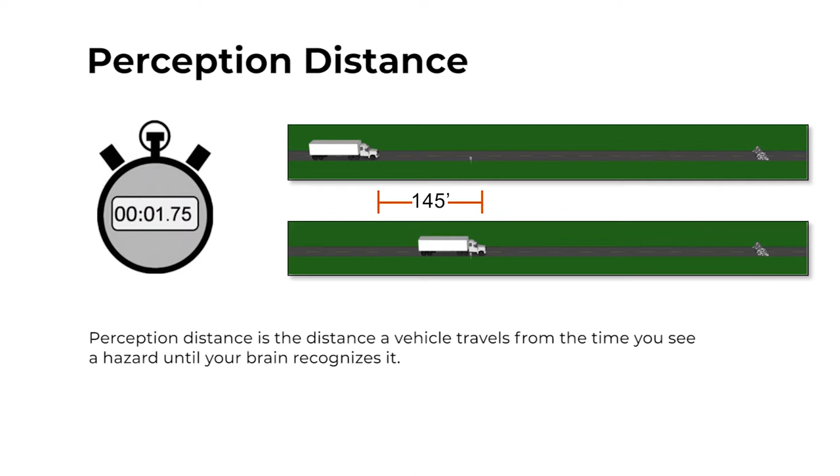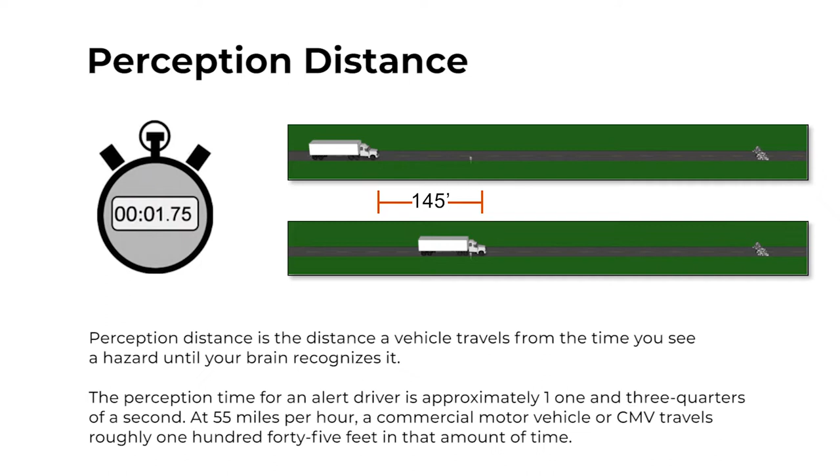Perception distance is the distance a vehicle travels from the time you see a hazard until your brain recognizes it. The perception time for an alert driver is approximately 1 3/4 of a second. At 55 miles per hour, a commercial motor vehicle, or CMV, travels roughly 145 feet in that amount of time.

Reaction distance is the distance a vehicle travels from the time your brain tells your foot to move from the accelerator until your foot hits the brake pedal. The average driver has a reaction time of 3/4 of a second. At 55 miles per hour, that accounts for an additional 60 feet traveled.

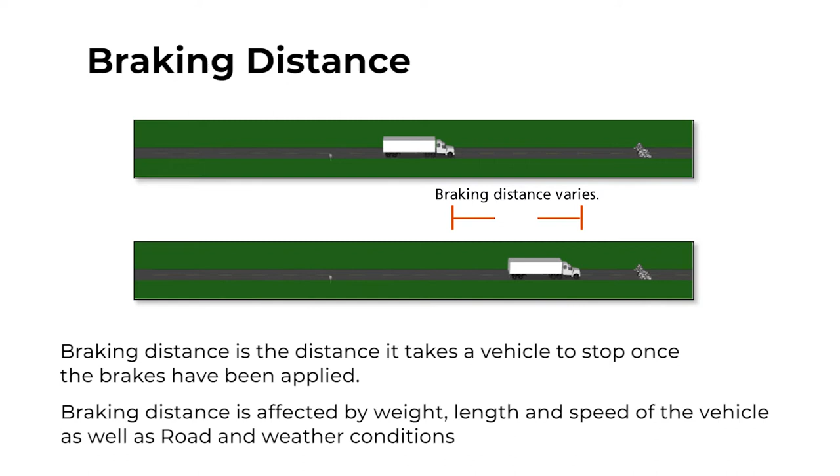Braking distance is the distance it takes a vehicle to stop once the brakes have been applied. Braking distance is affected by weight, length, and speed of the vehicle, as well as road and weather conditions.

Weight: the heavier the CMV, the more work the brakes have to do to stop it. But brakes, tires, springs, and shock absorbers on heavy vehicles are designed to work best when the vehicle is fully loaded. Empty CMVs require greater stopping distances, as an empty vehicle has less traction than a full vehicle.

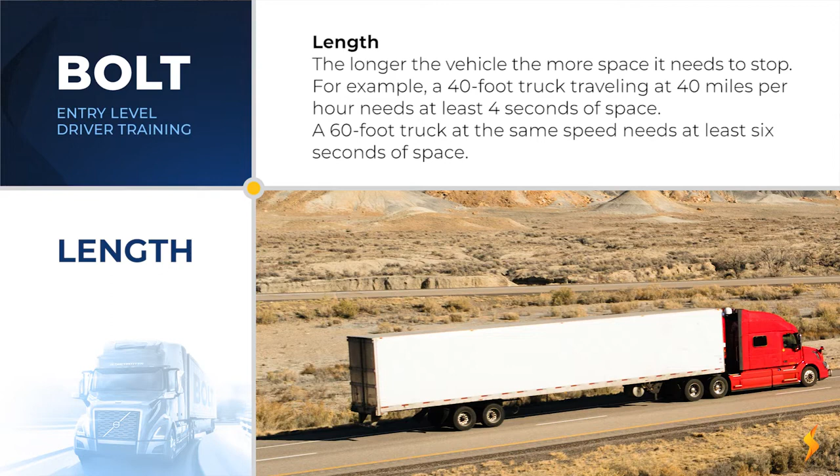Length: the longer the vehicle, the more space it needs to stop. For example, a 40-foot truck traveling at 40 miles per hour needs at least 4 seconds of space. A 60-foot truck at the same speed needs at least 6 seconds of space.

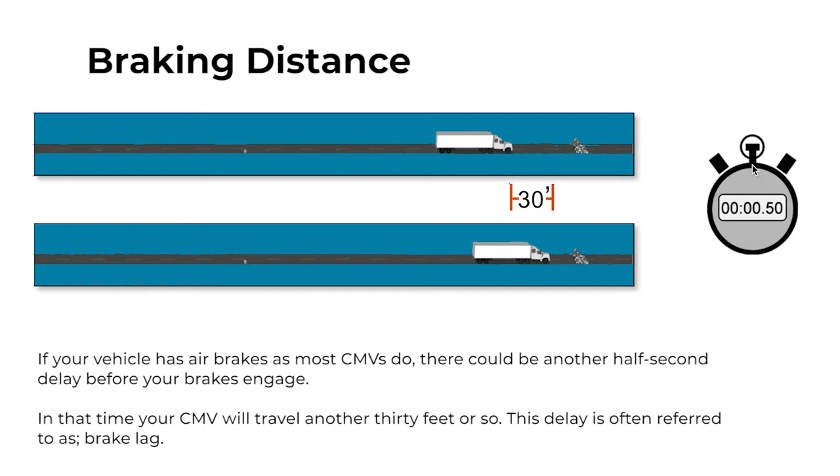Speed: the faster you drive, the greater your braking distance. When traveling at 60 miles per hour, the braking distance is 9 times greater than when traveling at 20 miles per hour. If your vehicle has air brakes, as most CMVs do, there could be another half-second delay before your brakes engage. In that time, your CMV will travel another 30 feet or so. This delay is often referred to as brake lag.

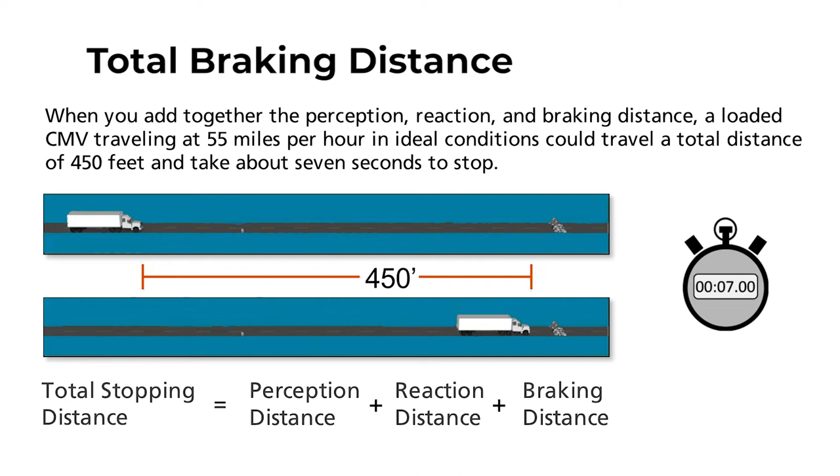When you add together the perception, reaction, and braking distance, a loaded CMV traveling at 55 miles per hour in ideal conditions could travel a total distance of 450 feet and take about 7 seconds to stop. When traveling at higher speeds, that stopping distance will be even greater.

How a road is designed will also play a part in how you manage your vehicle's speed. When operating a CMV on a curve or grade, you will need to take factors into consideration that you may not have to address when operating your car or truck.

The posted speed limits on curves are designed with cars in mind. Driving a tractor-trailer through a curve too fast, at or above the posted speed limit, can cause several problems, including skidding off the road or rolling the vehicle over.

Slow to a safe speed before entering a curve, at least 5 miles per hour below the posted speed limit. Slow down as needed, but keep in mind that braking in a curve can be dangerous. It is easier to lock your vehicle's wheels and cause a skid. Never exceed the posted speed limit in a curve.

Also, to help maintain vehicle control, be in a gear that will let you accelerate slightly as you go through the curve. Gravity and vehicle weight play a part in speed management when driving on upgrades and downgrades.

On an upgrade, your vehicle has to work harder to fight the pull of gravity and maintain its speed. To maintain speed, you must place more pressure on the accelerator and/or possibly shift to a lower gear.

On a downgrade, your vehicle is working with gravity, resulting in an increase in speed. Vehicle weight also has an impact on truck speeds going down a grade. Heavier trucks want to accelerate faster than lighter ones. You must use care in maintaining a safe and even speed.

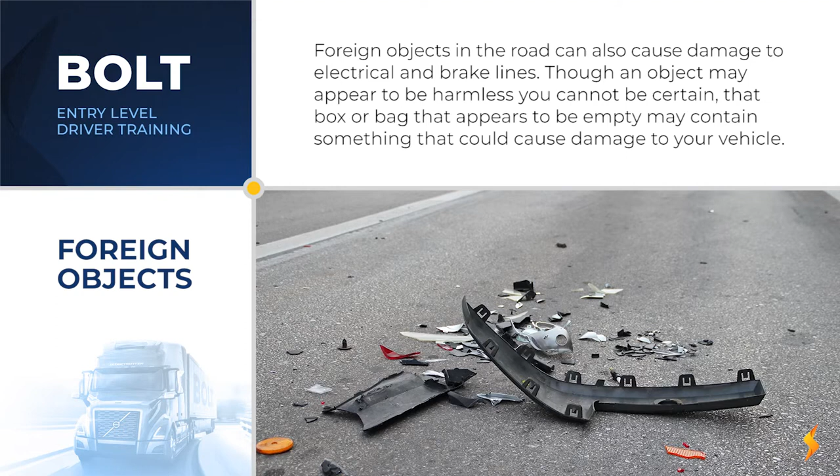Things that have fallen onto the road can be a danger to you and other motorists. They can be a danger to your tires and wheel rims and can get caught between dual tires. Foreign objects in the road can also cause damage to electrical and brake lines. Though an object may appear to be harmless, you cannot be certain. That box or bag that appears to be empty may contain something that could cause damage to your vehicle.

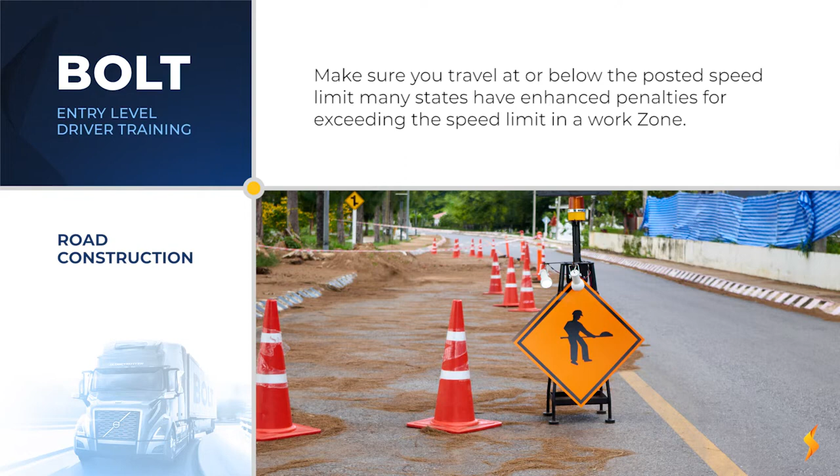Road construction poses its own set of hazards. Narrower lanes, sharp turns, and uneven surfaces are all hazards experienced in a work zone. Watch for construction workers and pay attention to other drivers who may be distracted. Reduced speed limits are also posted in work zones. Make sure you travel at or below the posted speed limit. Many states have enhanced penalties for exceeding the speed limit in a work zone.

Traction and visibility are two factors that are affected by extreme weather conditions. Traction is necessary for vehicle control. The less friction between a vehicle's tires and the road, the less traction. Certain road conditions reduce traction, and lower speeds are necessary.

Rain can affect a vehicle's traction. As rain begins to fall, it mixes with oils on the road, causing them to rise to the road's surface. Until enough rainfall breaks down and washes them away, there will be a layer of slippery oil between a vehicle's tires and the road. This condition can last anywhere from a few minutes to a few hours.

New pavement is more slippery when wet than old pavement. New pavement has a greater concentration of oils that have yet to be washed away by years of rain. White foam on the road is an indication of oil and water mixing, a clue that the road surface is slippery.

Heavy rain can cause a vehicle to hydroplane or cause the vehicle's tires to lose traction and skim along the water's surface. When a vehicle hydroplanes, its tires are not in contact with the road and traction is lost, resulting in a loss of vehicle control. If recent rainfall has been heavy, approach standing water with caution. When it rains, vehicle speeds should be reduced by at least 1/3.

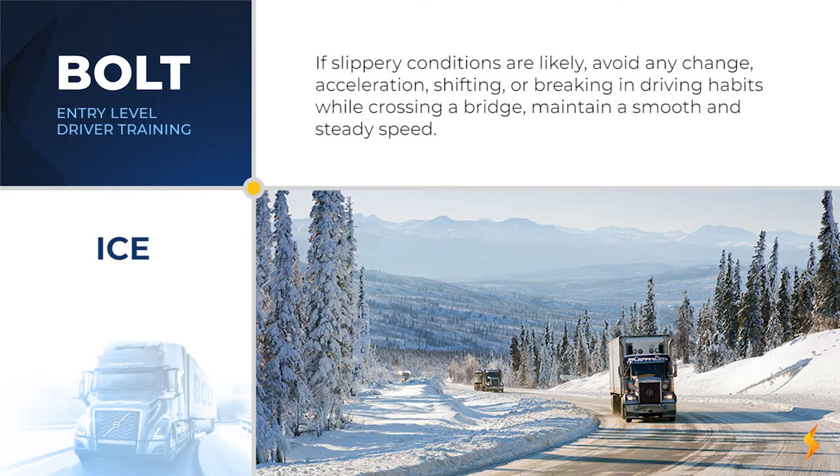If slippery conditions are likely, avoid any change, acceleration, shifting, or braking while crossing a bridge. Maintain a smooth and steady speed.

At night, hazards aren't easy to see, and you may not recognize them as quickly as you would during the day. Because of this, you should reduce vehicle speed, increase following distance, and drive within the range of your headlights. Overdriving the headlights can adversely affect visibility as well as your ability to stop for hazards. When rounding a curve, headlights shine straight ahead, off the road, reducing vision. Reducing vehicle speed is the best way to deal with curves.

When driving in heavy traffic, the safest speed is generally the speed of the other vehicles on the roadway, provided you can maintain an adequate following distance and you are not violating the posted speed limit. If you are unable to maintain a safe following distance, slow your vehicle 3 to 4 miles per hour less than the flow of traffic.

Often, drivers believe that exceeding the speed limit can save or make up time. When operating in traffic, this isn't always the case. If you are traveling faster than the speed of other traffic, you will have to pass other vehicles. This increases your chances of being involved in an accident. This type of driving can also add to your level of fatigue, which can also increase your chances of being involved in an accident.

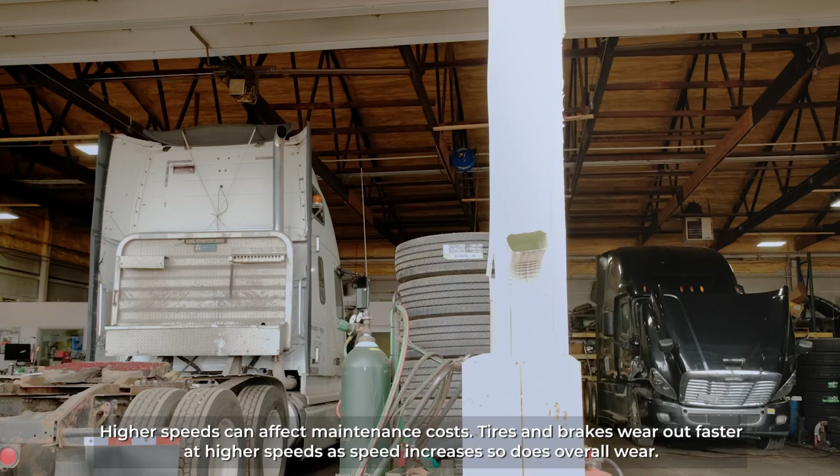Also, speeding convictions can be costly. As well as incurring fines, speeding convictions may be tracked by your insurance carrier, prompting higher premiums. Higher speeds can affect maintenance costs. Tires and brakes wear out faster at higher speeds. As speed increases, so does overall wear.

Your speed has a direct and substantial effect on your fuel economy. By adjusting your speed down even a couple miles per hour, you can positively affect your fuel mileage and save thousands of dollars over the course of a year. Due to safety concerns, many motor carriers have policies that limit or prohibit the use of cruise control.

You should now be able to discuss the 3 factors that affect your stopping distance, recognize ways to manage your vehicle's speed through curves and on grades, describe why you should adjust your speed when you encounter poor road conditions, inclement weather, and heavy traffic, and explain why maintaining a safe speed is important as a professional driver.